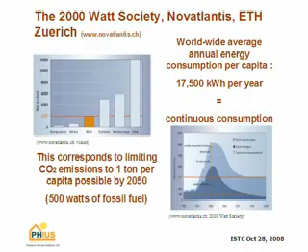So we have these fossil fuel sources available to cover our energy needs. But if we look at the International Energy Agency's World Energy Outlook, they're proposing an increase of about 60% worldwide. With India and China coming onto the market wanting a piece of the pie, our energy consumption is projected to go up by 60%. If we do business as usual relying on fossil fuels, this is how it's going to look. But as we saw with peak oil, this is not going to happen—we won't have enough oil available.

With the 60% increase in energy consumption, we get to the next problem. We're already using so much fossil fuel in terms of CO2 that global warming has reached a very critical level. I don't think we need to debate anymore if it's true or not—even if it wasn't true, I wouldn't want to take a chance on that. We're already emitting so much CO2 that we'd theoretically need about 2 atmospheres to safely handle it. We're already in a very critical zone.

Looking at the next 20 years, we're looking at an increase in world energy consumption of about 60%. So we're in real trouble if we intend to provide that energy through fossil fuels. What are our options? We have nuclear available, renewables available, biofuels, and efficient technologies.

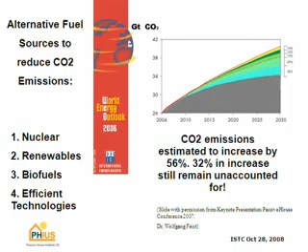So with passive house technology, we have a chance—if we start building every single new construction as passive house now, and retrofit at the same time, we actually have a chance to bring worldwide energy consumption down in terms of CO2 emissions. By 2030, we're expecting another push in renewables and energy efficient technologies. With passive house technology, we can almost stabilize the climate.

Why passive house and the building sector? Because about 48% of CO2 emissions are caused by the operation of our buildings. But this is worldwide, right? This is worldwide, yeah.

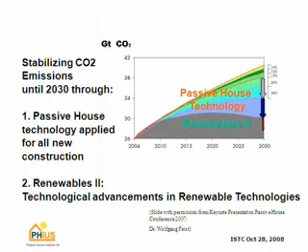Okay, so this is kind of like the big picture. Why passive house? It's a very crucial factor that we reduce the CO2 emissions through the operation of our buildings. And how do we get there now? What does that in essence mean for how we construct our buildings?

So now we kind of turn the concept around. We have built our houses so far the same way, like south, north, east, west, 2-by construction, and then we put a variable, usually oversized furnace, into the building to condition it.

So now the passive house does the opposite. It says, okay, we look at the big picture of the sustainable energy society, and we have to reduce each person's consumption down to 2,000 watts.

How much is that? How much can every person then afford to heat their houses with? So when we have the little picture of the hairdryer right there, for a passive house it comes out to about the energy amount of a hairdryer.

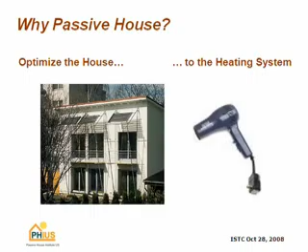So yeah, that might sound too good to be true. But it is a very stringent energy standard, and it is actually possible. The reason why it's possible is the same principles we have been using since the early 70s for passive solar houses.

We use passive solar gains, orientation, we use internal gains. So again, the main principle is minimize all the losses first and maximize the gains. Build the shell. The shell becomes the variable, no longer the heating system that we put into the building.

So this is a very important concept, and it took me a very long time to actually realize that we're using the same amount of energy whether we're in Minnesota, or Miami, or Berkeley, or New York. All houses are going to be heated by the same amount of energy, and then the shell is variable and changes depending on climate.

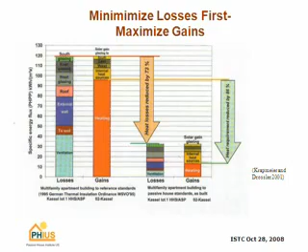So why positive net energy home? A while ago, I started looking into the definitions of the zero energy home. And once you look into that, you very quickly get to the definition of the net zero site energy home, then you get to the net source energy home.

And then there's a school of thought that says, well, that is all not good enough yet. We really have to go to net zero emissions. And what that means is we have to overproduce to actually offset the carbon that we have generated through building our building. And this is what we're seeing right here.

The passive house concept reduces the overall energy consumption by 90% for operational energy. And that means that the overall total household plus operational energy is reduced by about 70 to 80%. At that point, if everybody did that, we're getting into the realm where we can provide our remaining energy needs through renewable sources - we have about 20% feasibly available to us.

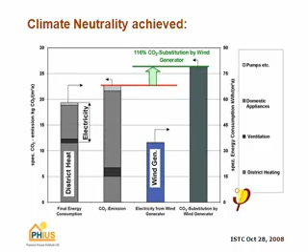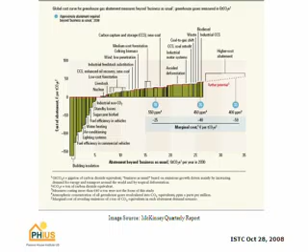I'm not planning on going into great detail with this slide, but the interesting part right here is the building insulation. The building insulation is the biggest bang for the buck - this is our cheapest way to reduce our carbon emissions. And this is really good news. Also, insulation is the cheapest material in construction, so we will see that this is actually cost effective to do.

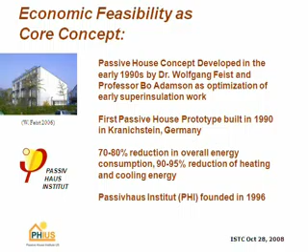This is kind of like the interior economic feasibility of the passive house concept. Dr. Feist and Bo Adamson, they went ahead and established the passive house concept, and they defined the metrics of the factor 10 energy reduction and overall 70 to 80% reduction. And they looked at what happened in the 70s in the United States.

A lot of people always tell me, well, passive house is really a European concept and it won't work in the United States. Well, as you all probably know, the Small Homes Council here in Illinois, Wayne Schick, has the honor of having coined the term super insulation. So the super insulated house - Urbana is really the birthplace of the super insulated house.

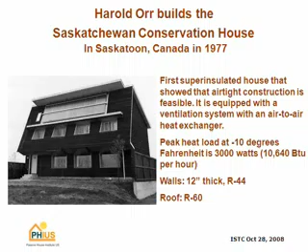Bo Adamson and Dr. Feist studied all these phenomenal projects, including Harold Orr's Saskatchewan house. I had the pleasure to meet him personally last year. He's a phenomenal person, still out there building and retrofitting houses to passive house standard right now.

And then, of course, Amory and Hunter Lovins, tunneling through the cost barrier. Amory Lovins built his Rocky Mountain Institute in 1984, featured on the cover of Solar Age magazine. Then in 1985, 1986, there was a change in government, energy became cheap, and that magazine completely vanished. All the super insulation knowledge basically got lost. It's really amazing.

I recently bought the book by William Shurcliff, The Super Insulated Houses and Double Envelope Houses. If you look at the details in this book, we had it all there—we had it all in 1978, 1980. So now we're kind of coming back full circle.

In Europe, they felt the energy crunch much earlier than we did over here, so they started investing in energy conservation. They recovered all these ideas and details, and that is finally the result of what all these architects and scientists came up with.

This looks kind of abstract at first, but this is the economic feasibility curve. If we tell people they need to super insulate their buildings and use super insulated windows, and it's completely unfeasible for them to do, nobody is going to do it if it's too costly. So what they found in 1990, when Dr. Feist built his first passive house, was that until then it was believed that 40 kilowatt hours per square meter per year—a low energy house—was the most cost effective you could do with super insulation and conservation. So for a little while, that was the case.

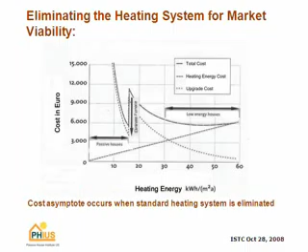That's really where the passive house concept started to make incredible sense. That was the beginning of understanding: if we reduce our loads to that point, we have a cost advantage and can make it work from an economic feasibility point of view for the homeowner. And of course that was just the beginning—they realized this drop was a good point for the metrics to define, and that metric is the 90% energy savings.

So to build a passive house, this is not where it stops. It's not good enough to just super insulate and then eliminate the furnace. It takes integrated design principles from beginning to end. We cannot just take a design and then put passive house on it. What's really critical to make it possible and economically feasible is to build it into the design right from the beginning, and to uncover every single cost trade-off that we can find.

Really good integrated systems designers can build passive houses today for the same cost as it costs to build a traditional building. So why wouldn't anybody do that? If that was the case—and it is the case—I've seen two people in New York, which I respect greatly. They are the masters of cost trade-offs. They managed to build passive houses today for the exact same cost as a traditionally built building.

What they do when they get a job: they get the first baseline bid and then they work towards it until they beat it. The baseline bid is the International Energy Conservation Code 2006, and the passive house saves 90% in operational energy compared to that baseline bid, for the exact same price.

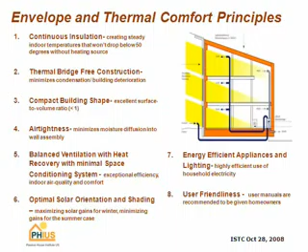This one, I'm not sure why this is not working. So the conventional house, this guy is pretty unhappy, right? So why is he unhappy? Because the interior surface temperatures are very different from the exterior surface temperatures, and that is due to not sufficient insulation.

Low surface temperatures equal discomfort. Everybody knows that from large windows—like right here we see heat sources under full height windows, because the windows are most likely not very high in R value. So what happens is we get a convection loop going in front of the windows, and we have to introduce a heat source in front of it so we don't feel uncomfortable.

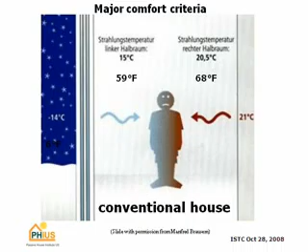In a passive house, this no is being transferred into a yes, and a very happy guy. The reason for that is that the exterior surface temperatures have been brought up to a level that the difference between interior and exterior surface temperatures is minimal. So now this guy is very happy, and that also leads to interesting side effects.

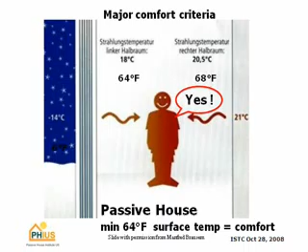When I went to architecture school, I was told I need to place a heat source in front of the window. Once you start using these super triple pane windows, very high in R value, the convective loop is actually eliminated. There's no need for a heat source in front of that window anymore—for full height windows, no more necessary.

Here you can see in a passive house, it's almost even. This would be really cold. In a passive house, the heat distribution does not lead to convective loops that feel uncomfortable.

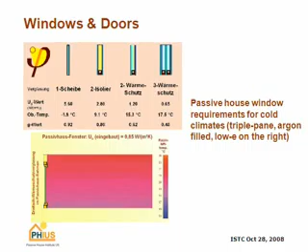And how do we get there? So now the windows and doors are probably the biggest obstacle that we have in building passive houses in the United States today. The reason for that is the window industry has come up to speed with glazings.

There are glazings available that are fairly high in R value so far. Still, the spacers might be a big problem because there are potentially aluminum spacers being used in double pane and triple pane windows. Not all windows use super spacers yet, which have no thermal loss around the edge of the window glazing. But most windows we see today in buildings have no insulation in the frame.

So if we look at the glazing to frame ratio, it's quite amazing—there's a lot of frame around a window. In most buildings, there's a giant thermal bridge around the glazing, and that is the frame. So in a passive house window, we consider the frame to be a thermal bridge, and we conclude that we have to insulate it. Here are probably the two best windows on the planet.

This one is a wooden window that is insulated with cork. So it's not only one of the best performing windows, it's also basically cradle to cradle, which I like a lot. The other window right here is insulated with graphite-enhanced high density EPS, which is the best of the foams.

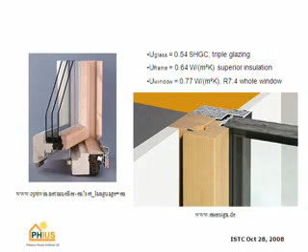And then there are a couple of really fancy systems by now in Europe, and it's really exciting. This is a curtain wall system with a U value of 0.8—it is 0.14. And at that point it gets really exciting, as soon as we can build any building to passive house standard with those frames.

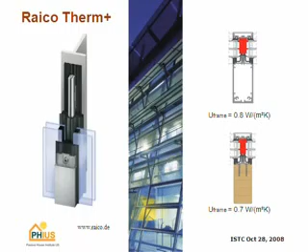And then of course doors as well. Doors have to be super insulated, they have to be super sealed. The doors we've been using so far all had multi-lock systems. Because remember, one of the passive house principles is to build super airtight. And if we use a typical door that locks only in the middle, it starts to bow, and we have absolutely no chance to make this door airtight.

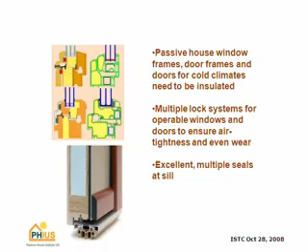So now you might say, what am I going to use for my walls? Really, as far as passive house is concerned, wall construction is wide open - everything and anything works, as long as you meet the thermal resistance requirements for your climate. You can use foam, cellulose, fiberglass, straw, cotton, wool, whatever works in terms of thermal resistance for your climate.

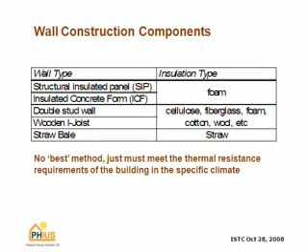These are the insulation materials I prefer right now. I try to use only expanded polystyrene for the reasons I mentioned earlier. Expanded polystyrene is expanded using pentane, which has a global warming potential of only 7. It's formaldehyde free and can be recycled. It can be used underground, and it can be obtained in high densities, so you can insulate under the footing, which also increases the R-value significantly.

Cellulose is the uncontested champion of insulation. The embodied energy in cellulose is so low - it's a wonderful material. If it's possible for your climate... we haven't been able to use it here for our small homes because the R-value didn't quite make it with cellulose, but it's the absolute best insulation material I can think of, if applied correctly.

There are issues with settling, but if applied at the right density, or in damp spray, that can be prevented. We've been using high density spray-in fiberglass with great success. It's very cost effective, and it doesn't settle. I have a couple pictures later that show our prefabricated panels.

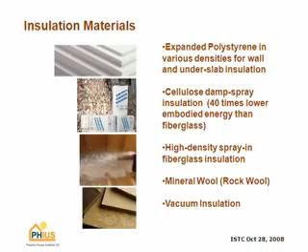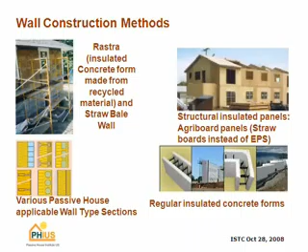Again, you can use straw - here's a picture of Julie's house. You can use straw board, stud construction, double wall construction, ICFs - anything works as long as you meet the thermal resistance requirements.

So now a couple examples that we've been building here in Urbana. This is the first Fairview house, which was basically the prototype. We still built that building on site - Todd was working on that project as well, so that was still very cumbersome. We were really pioneering the system, and this is a construction manual by TrusJoist.

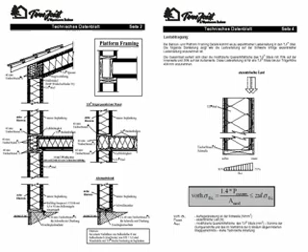Unfortunately it's not available in English and not available in the United States. I've been talking to them for a while now, trying to get them interested, to tell them your product is a prime product to create very thick and well insulated walls. So we've been working with these details, and they've been working very well for us.

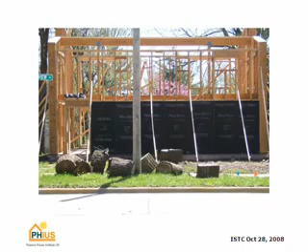This is a picture of the Fairview house under construction with structural fiberboard sheathing on the outside. Then the insulator goes in on site, nets it, and fills it with high density fiberglass.

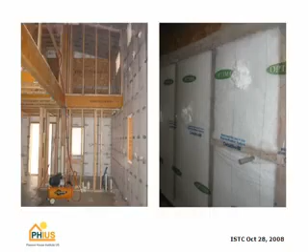So the first project was still very difficult, piece by piece, and we did not make our goal of beating the cost barrier. We needed to bring the cost down.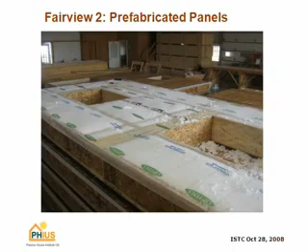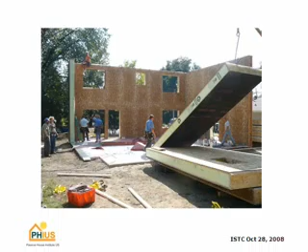So we decided to prefab the panels for the next project in the shop, and that was an incredible cost advantage. The house went up basically in a day, and it's amazing - it brought the cost down considerably.

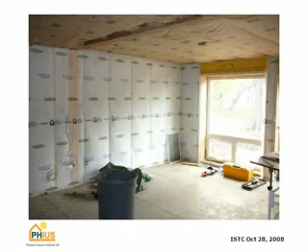This is an interior installation layer, which we also introduced after the experience with the first project. Now the plumber and the electrician can go in and do business as usual. It also is our bearing wall for the floor plate. At that point, the inspector has no problem because it's business as usual. So the super insulated panel basically becomes a curtain wall, if you want, and then business as usual, the interior wall also gets insulated.

Everything is the same. These are the two passive houses that we have built, on Fairview Avenue in Urbana. The left one right now is still for sale in this market. It's a little tough—I have an appointment with a potential home buyer tonight, so I'm hopeful that we finally can get it sold. And this other one was sold in...

Did you have a floor and wall connection to that, where you were showing the section? All right, this one? Yes. How do we connect the floor to the wall?

The wall, the 2x3, or now we went to 2x4. Those walls are lag bolted into the TJI. And then that interior 2x4 wall is just connected to the slab, business as usual.

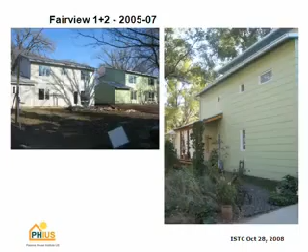Okay, so this one is a very exciting project for me. Does somebody have the time? What's the... oh yeah, excellent, good.

This one is my house. We built that, started in 2002, 2003. Phenomenal—I haven't turned the heat on yet. When it gets a little too cold, I basically put a plate out with 10 tea candles, and I can see the temperature rise. It's amazing, and it's so comfortable.

Also a really nice side effect one will realize living in a passive house: the inside surface temperature is now so comfortably warm that the temperature setting—I'm comfortable at 65, and there's absolutely no, I don't feel cold.

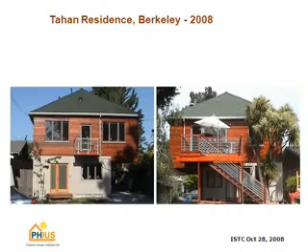So once the designer becomes acquainted with the principles of a passive house and the integrated design becomes kind of second nature, we can pretty much make any shape work.

This is going to be part of the tour of the Passive House conference that we have coming up in Duluth this November, so people will be able to see this house. We have a bus going to 2 projects.

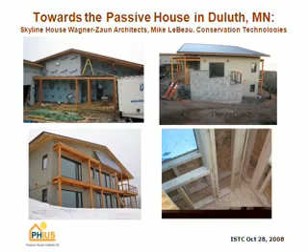Everybody would say, yeah, I can do that, right? We're going to do it for $100,000, and we're going to have it modularly prefabricated. So at that moment, when that passive house hits the mall, people can order a passive house that's economically feasible for everybody. And once the shell is right, with technology advancing and PV prices coming down, you can always later add a PV system if you cannot afford it right away and become truly carbon neutral. That is a great opportunity in terms of the passive house design.

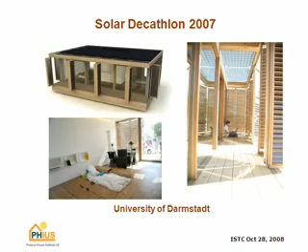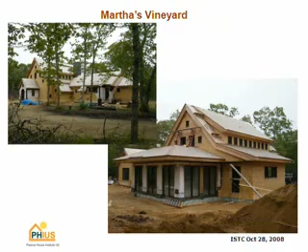This is our first project in the East. It's on Martha's Vineyard, designed to passive house standard. And there's the windmill. I was just there a couple of weeks ago. My car broke down, so I had to stay a couple of days extra. Too bad - well, I got to see the windmill go up. Otherwise I would not have had the opportunity. Once it's there, it's really amazing.

And this house, as you can see, we were discussing the compact shape - none of it is the case here. When I got brought in on this project, the master bedroom was over here, and the study was its own separate building, everything connected with a glazed corridor. I was able to convince them to push it together, but still not a very good surface to volume ratio, right? And then where's all the glazing? The glazing is in the west.

You don't want glazing in the west because you need to shade it, and east and west glazing is very hard to shade. So we had to deal with that. Also, going back, this is the south - not really a perfect passive solar orientation, right? And we still made it work. The price was 2 inches of more insulation all the way around the envelope, but you can make it work. And insulation, again, is the cheapest thing on site.

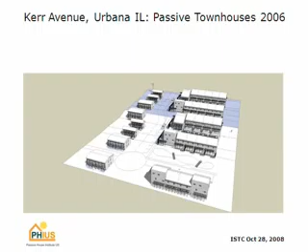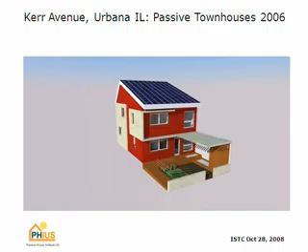So this is the Kerr Avenue, Illinois project. The city of Urbana put out a proposal not too long ago for a multi-family townhouse area, and the goal is Passive House and, if budget permits, carbon neutrality. So we started designing a couple townhouses with PV systems integrated into the roof, playing around with a couple of schemes right now, different layouts.

But the great thing is this is the PHPP, the modeling tool for passive houses. If I design, I have this tool open right from the beginning, and it tells me immediately how my building is doing in terms of energy performance. You input everything - wall thickness, R values, window quality, air tightness - and it gives you a summary sheet telling you if you're making passive house standard or not. In this case, we're even below passive house standard - we're at 10 kilowatt hours per square meter per year, which is very, very low. This is not much heating at all.

What the program also does is output what you need in terms of renewable systems to be carbon neutral. You can see here, total emissions, CO2 equivalent. This is the total CO2 equivalent that the house puts into the atmosphere, and then we added a renewable system that overproduces, making us carbon neutral. So that program tells us exactly what kind of system we need, and we did the calculations.

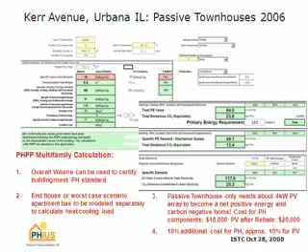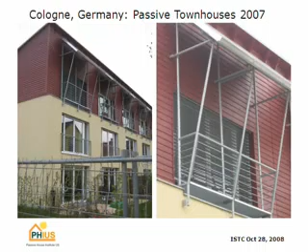I was having workshops a couple weeks ago at PG&E in San Francisco, and I did challenge PG&E. I said, look at this.

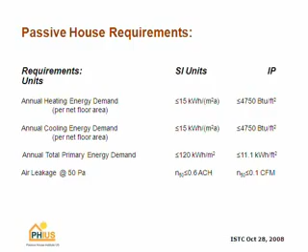Okay, final conclusions: 15 kilowatt hours per square meter a year. You have all these metrics on the sheets I distributed earlier. For cooling, the same. Total primary energy demand, 120 kilowatt hours per square meter a year. That means we're taking into account the losses from the coal-fired plant to the plug. So site energy would be about 40 kilowatt hours per square meter a year — by a factor of 3, we're losing energy. And the air tightness is 0.6.

This is California, Europe, Illinois — a couple of R-values just to compare. California needs R-22, Europe needs R-38, and here in Illinois we need about R-56 for the wall.

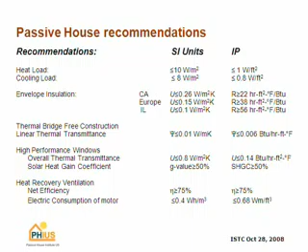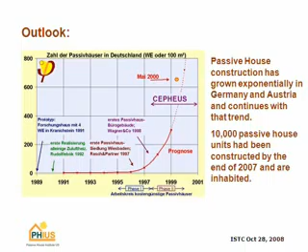And I love this slide. In 1996, they had 10 Passive Houses in Germany. It was exactly the same situation as we have right now — building was down, people were spending very little, and almost all construction businesses went bankrupt, except the tiny little branch of Passive Housing, which kept going exponentially. Now they have over 10,000 units, and I think we can repeat this here, turn it around on a dime, put out carbon neutral houses, and put a stop to global warming.